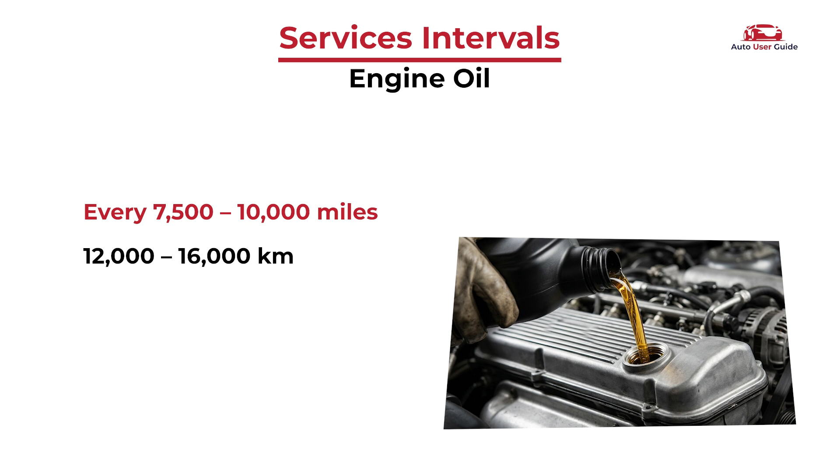Engine oil needs to be changed every 7,500 to 10,000 miles, which comes out to around 12,000 to 16,000 kilometers. If you drive in tough conditions or put a lot of load on your engine, sticking to the lower end of that range is the better call.

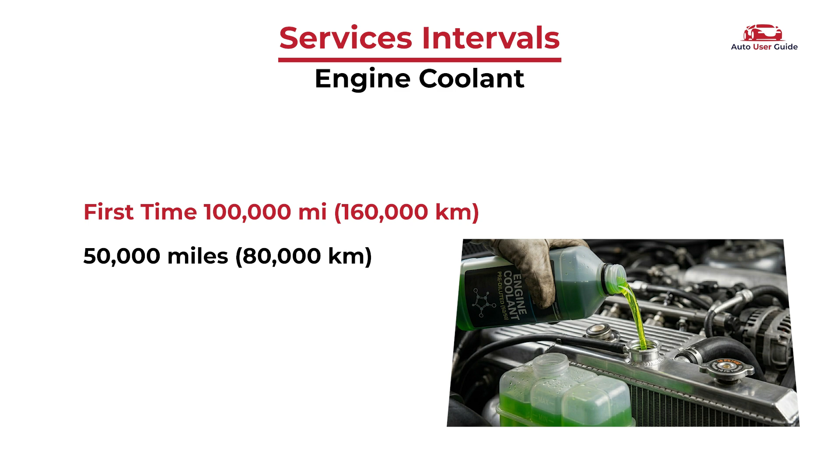Engine coolant has a much longer life. The first replacement comes at around 100,000 miles. After that, it needs to be swapped out every 50,000 miles going forward. It keeps your engine temperature in check, so keeping it fresh is something you don't want to skip.

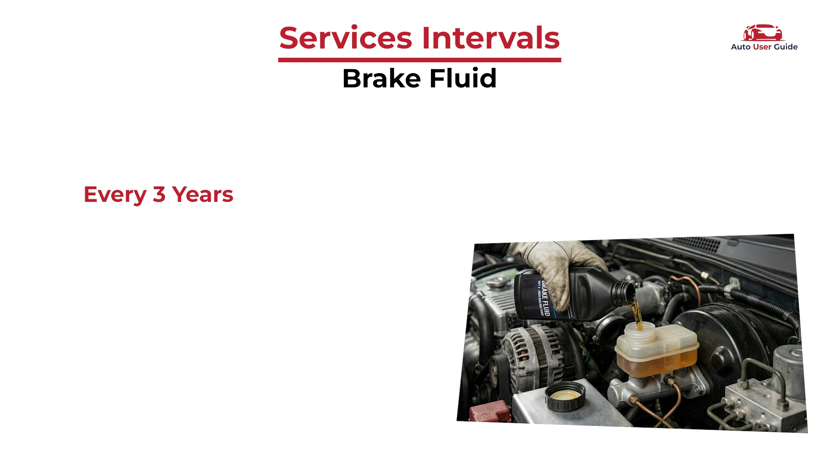Brake fluid should be replaced every 3 years, or somewhere between 30,000 and 45,000 miles, whichever one comes first. Over time, it absorbs moisture, and that slowly reduces how well your brakes respond.

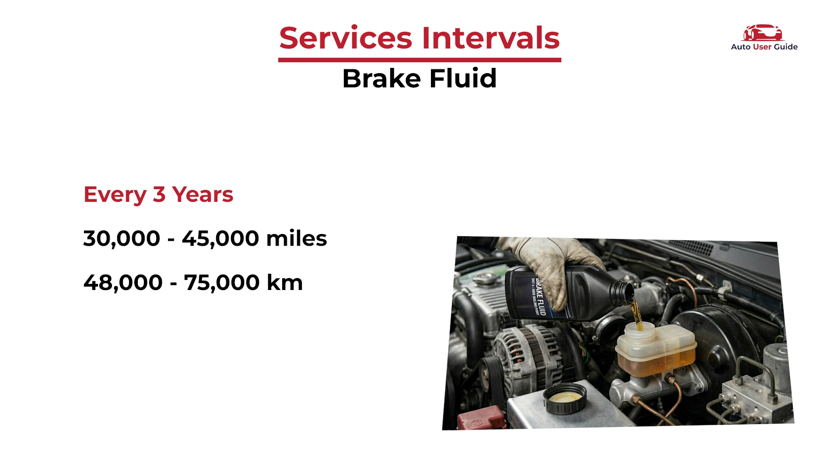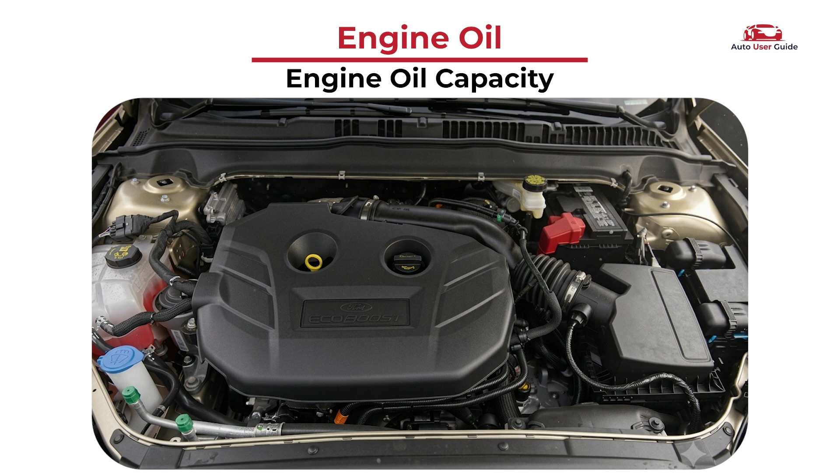Engine oil. Engine oil capacity. Alright, so when it comes to engine oil capacity, the amount your car needs depends on the size of its engine. Not every engine drinks the same.

If your car runs a 1.5-liter engine, the total oil capacity, including the filter, is 4.3 US quarts, which comes out to about 4.1 liters. That's your number every time you do an oil change.

If your car has a 2.0 or 2.5-liter engine, it's going to need a bit more. The capacity there, again, including the filter, goes up to 5.7 US quarts, or roughly 5.4 liters.

And if your car has the bigger 2.7-liter engine, the capacity increases a little further. Including the filter, it comes to 6 US quarts, or about 5.7 liters.

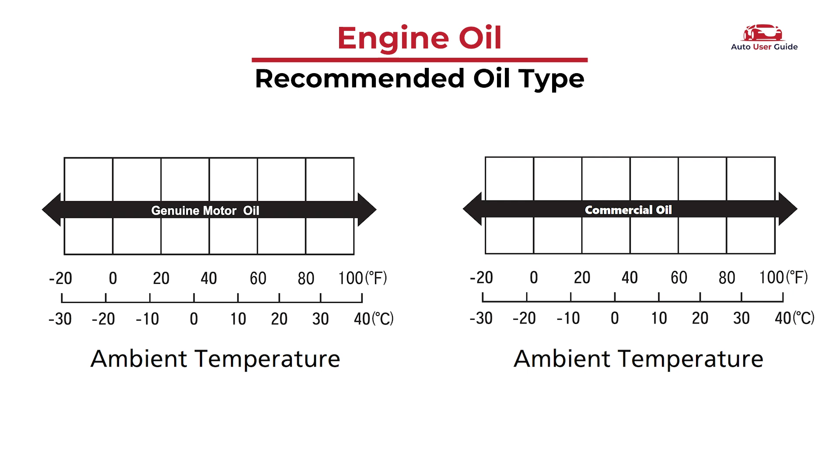Recommended engine oil. Now let's talk about which engine oil you should be using. The recommendation is to go with a genuine engine oil, or any good quality commercial engine oil, if it matches the right type and viscosity for the temperature in your area.

That last part matters more than people realize. The oil that works well in a cold climate isn't always the best choice for somewhere hot, so always check the viscosity chart and pick accordingly.

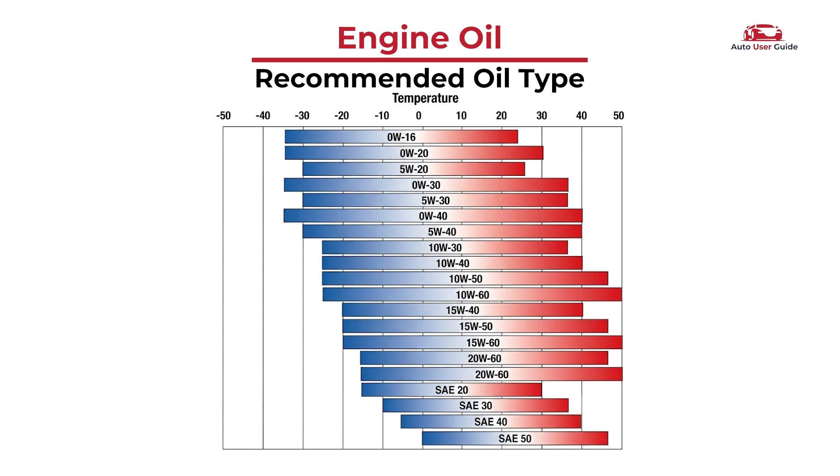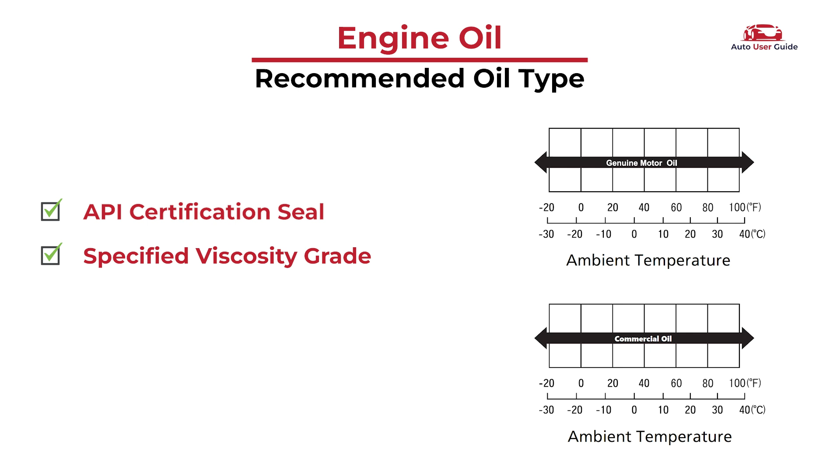On the topic of synthetic oil, you can use it. Synthetic motor oil is perfectly fine as long as two things check out: it carries the API certification seal, and it matches the viscosity grade your engine calls for. If both boxes are ticked, you're good to go.

Change engine oil and oil filter. Before anything else, change your oil and filter based on the maintenance message that shows up on your driver information display. That message is your reminder. Don't ignore it. Here's how the full process goes.

Step 1. Start the engine and let it run until it reaches its normal operating temperature. Once it's warmed up, turn it off. Warm oil drains out much more easily than cold oil.

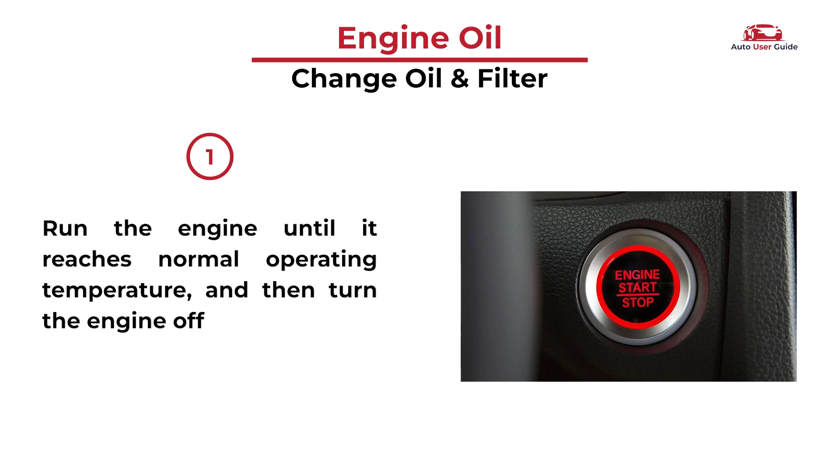Step 2. Open the hood and take off the engine oil fill cap. This helps the oil drain smoothly by allowing air in.

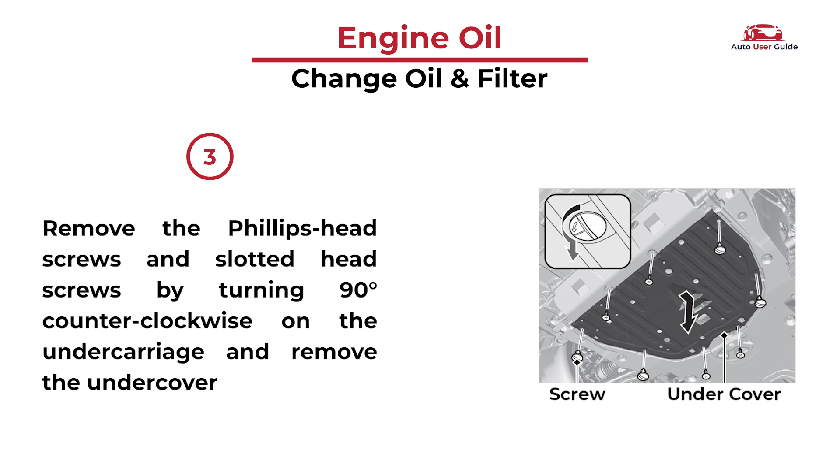Step 3. Get under the car and locate the undercover. Remove the Phillips head screws and slotted head screws by turning them 90 degrees counterclockwise. Then pull the undercover off.

Step 4. Find the drain bolt at the bottom of the engine. Remove it along with the washer and let the old oil drain completely into a container placed underneath.

Step 5. Remove the oil filter and let any remaining oil inside it drain out as well. Set it aside for proper disposal.

Step 6. Before putting on a new filter, check that the old filter gasket didn't stick to the engine's contact surface. This is a small but important check. A leftover gasket can cause an oil leak.

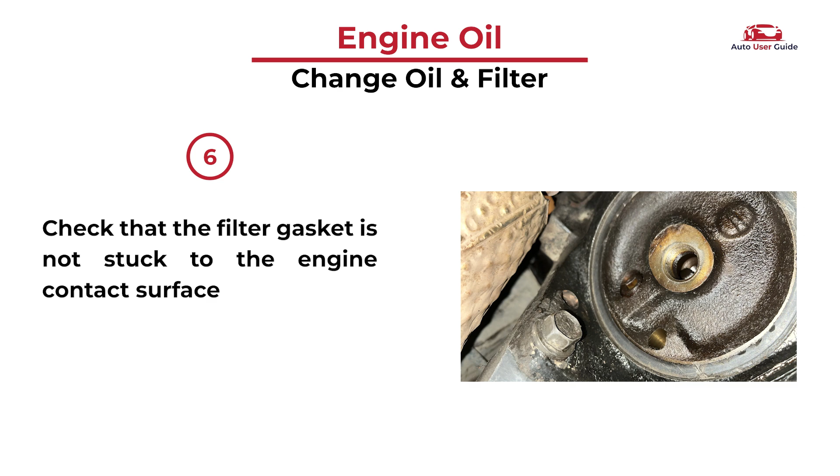Step 7. Clean the contact surface on the engine block, wiping away any dirt or dust. Then install a fresh oil filter.

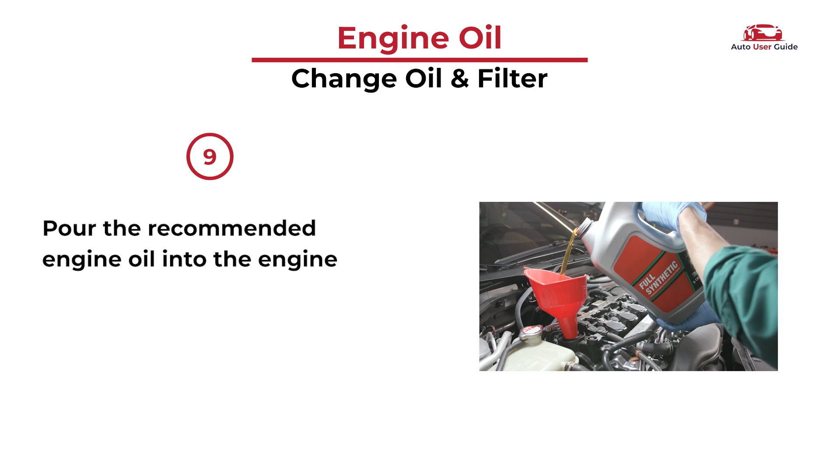Step 8. Put a new washer on the drain bolt and reinstall it back into the engine. Step 9. Pour in the recommended engine oil. Make sure you're using the right type and the correct amount for your engine size.

Step 10. Put the oil fill cap back on securely and start the engine. Step 11. Let the engine run for a few minutes, then get underneath and check around the drain bolt and oil filter for any leaks. If you see drips, shut the engine off and address it before going further.

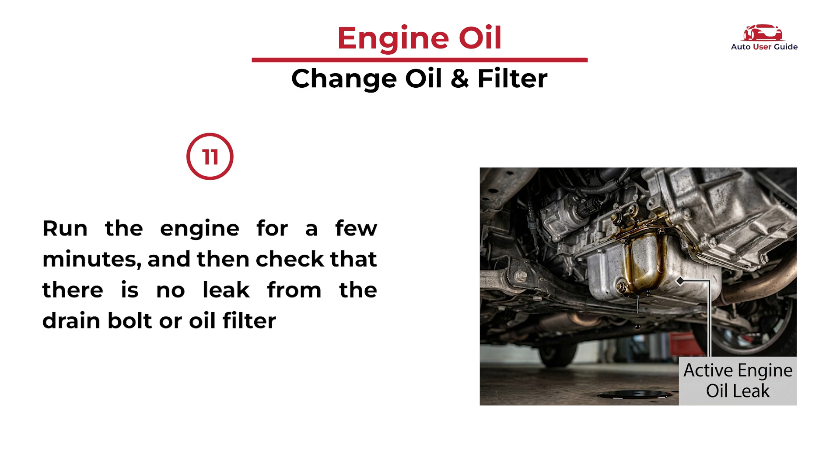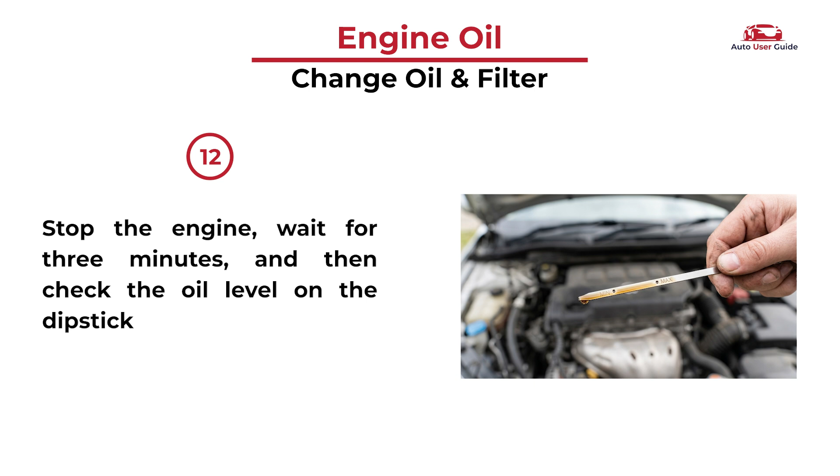Step 12. Turn the engine off and wait for about 3 minutes. This gives the oil time to settle. Then pull out the dipstick and check that the oil level is right where it should be.

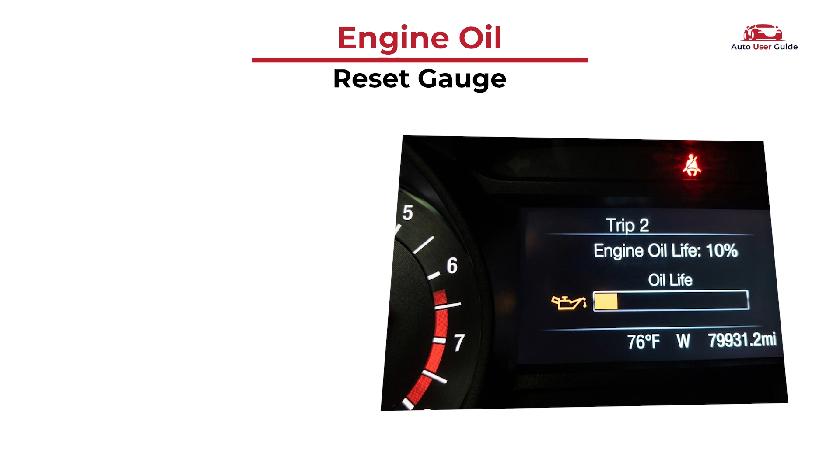Reset the gauge. After you've changed the engine oil, there's one more thing you need to do: reset the oil life gauge. If you skip this step, the car won't know the oil has been changed and will keep showing you an inaccurate reading. Here's how to do it on your car.

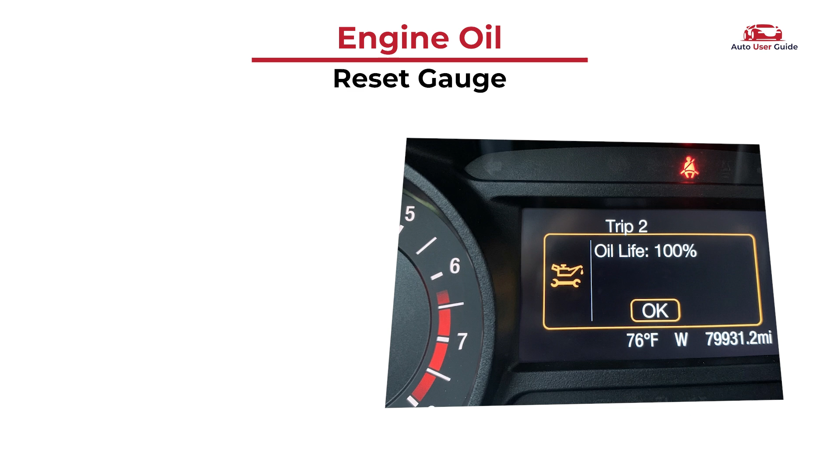First, make sure the ignition is on. You don't need to start the engine, just press the start button without pressing the brake pedal so the system powers up. Next, go to your driver information display and navigate to the vehicle information menu.

You'll find an option that shows your current oil life percentage. Once you're on that screen, press and hold the selection button, usually the one on your steering wheel, for about 10 seconds. The oil life indicator will start to blink, which means it's ready to be reset.

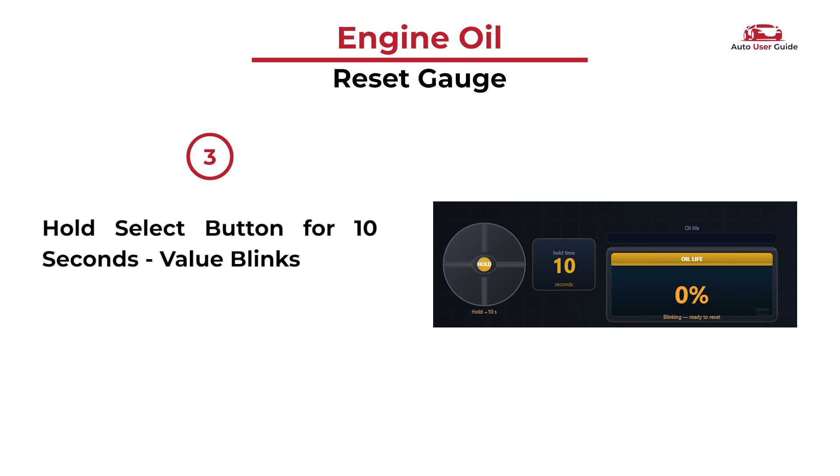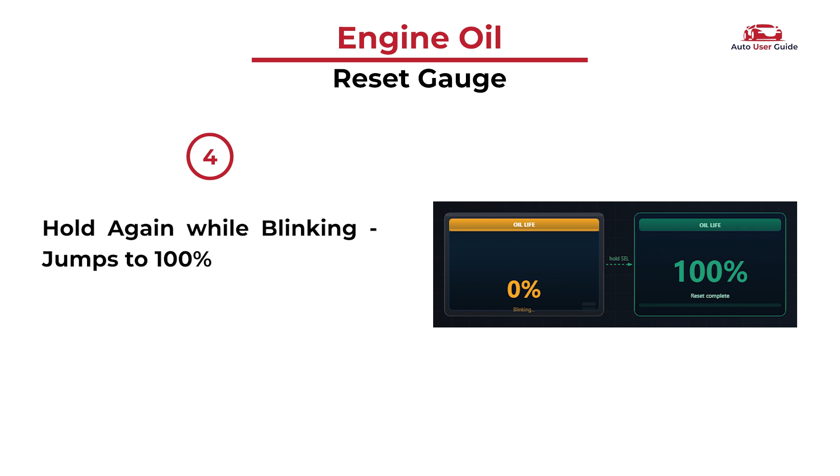While it's blinking, press and hold the button again. The display will reset back to 100%, confirming that the system now recognizes the fresh oil. Once you see 100% on the screen, you're done. The gauge has been successfully reset.

After that, go ahead and start the engine normally. Let it run for a moment and confirm that no warning lights related to the oil are showing up on the dashboard.

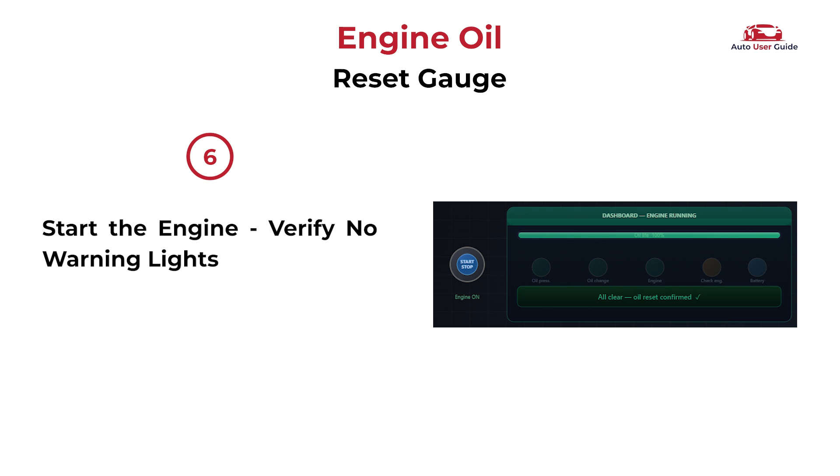Now we're moving on to coolant and fluid specifications. Keeping your coolant at the right level is just as important as your engine oil. It keeps your engine from overheating and running into serious problems.

Engine coolant, radiator. Before you touch anything, make sure both the engine and the radiator are completely cool. Never open the radiator cap on a hot engine. The pressure inside can cause boiling coolant to spray out and burn you.

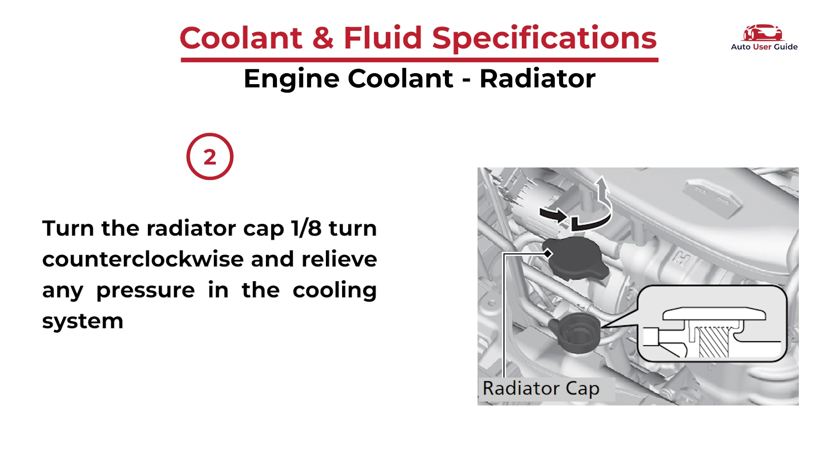Once everything is cool, place your hand on the radiator cap and turn it just 1/8 of a turn counterclockwise. This releases any built-up pressure inside the cooling system. Give it a moment to settle. Now push the cap down and continue turning it counterclockwise to fully remove it.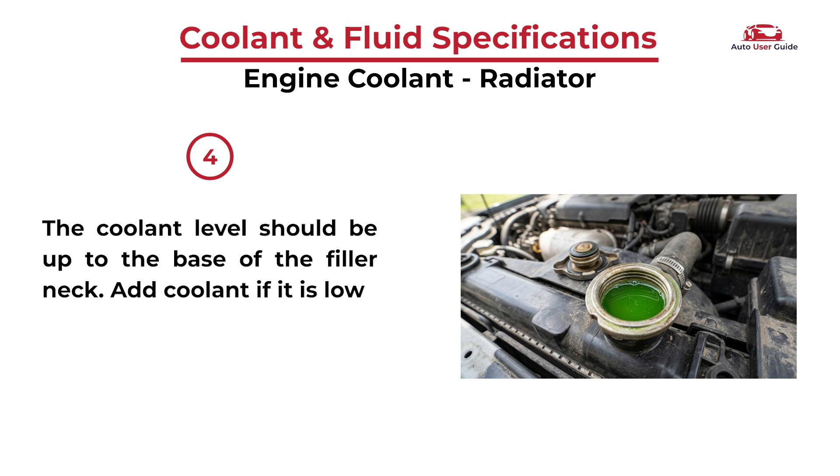Look inside and check the coolant level. It should be right up to the base of the filler neck. If it's sitting lower than that, go ahead and top it up with the correct coolant. Once the level is good, place the radiator cap back on and tighten it fully. Make sure it's secure before you close the hood.

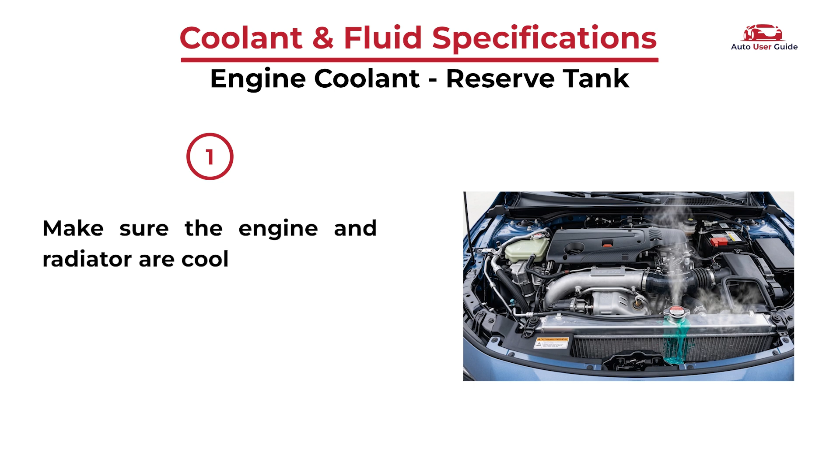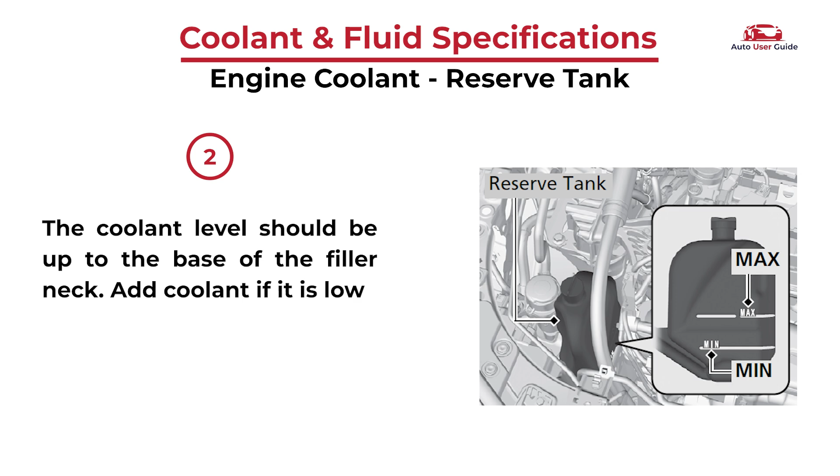Engine coolant, reserve tank. Again, before checking anything, make sure the engine and radiator have cooled down completely. Now locate the reserve tank. It's a small, translucent container usually sitting near the radiator. Look at the side of the tank and check where the coolant level sits. If it's below the minimum mark, add the specified coolant slowly until it reaches the maximum mark.

Don't go above it. Once the level is good, take a moment to inspect the cooling system for any leaks. Look around the hoses, the radiator, and the reserve tank itself. If you notice any drips or wet spots, that's something that needs attention before you drive the car.

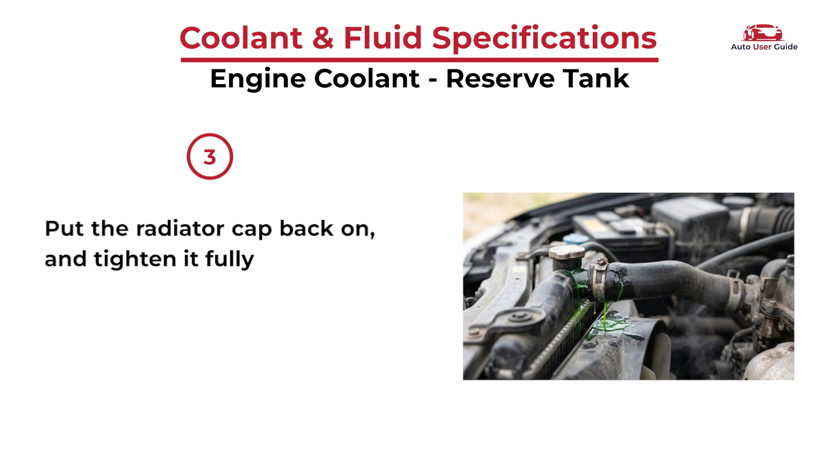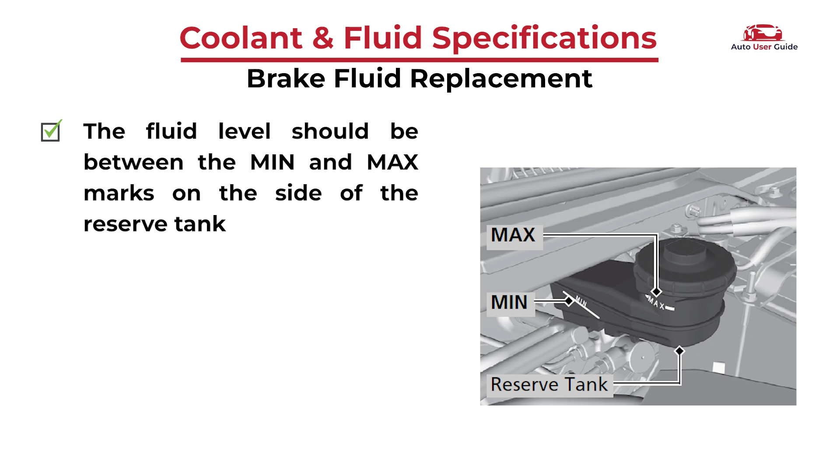Now, let's talk about replacement of brake fluid. Checking your brake fluid is straightforward. On the side of the brake fluid reserve tank, you'll notice two markings, a minimum and a maximum line. Your fluid level should always be sitting somewhere between those two marks.

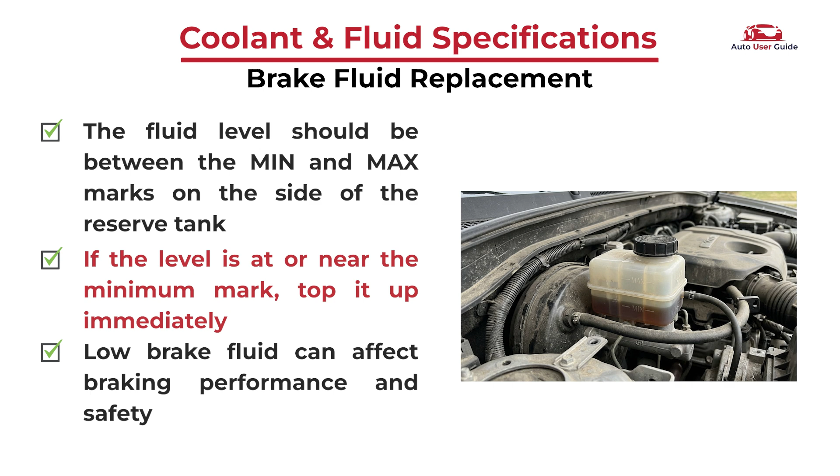If the level is at or near the minimum mark, you need to top it up. Don't let it drop below that line. Low brake fluid can affect how your brakes respond, and that's not something you want to find out about while you're driving. At the same time, don't overfill it past the maximum mark either. Just keep it in between and you're in good shape.

One thing worth mentioning for those driving a manual transmission model, your brake fluid reserve tank also takes care of the clutch fluid. It's the same tank serving both systems. So, as long as you're keeping the brake fluid level between the minimum and maximum marks like we just discussed, you don't need to check the clutch fluid separately. It's already covered.

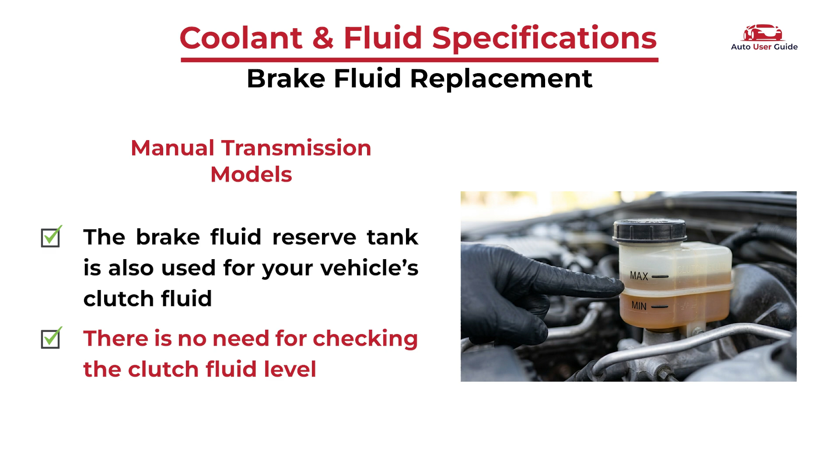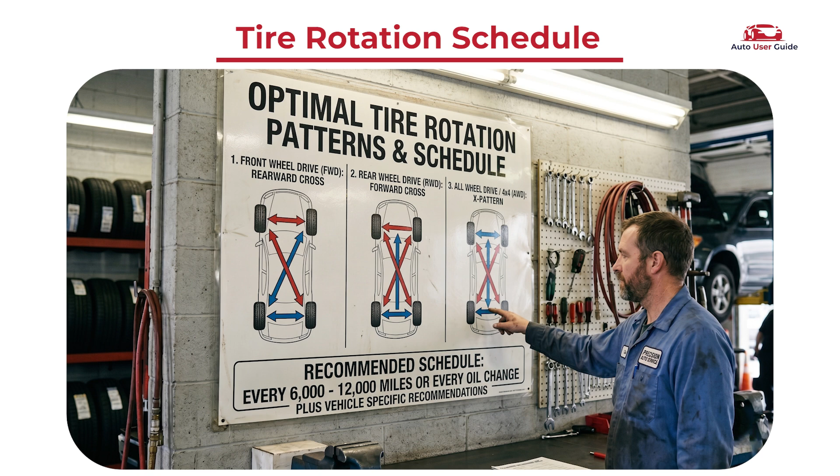Tire rotation schedule. Tire rotation is one of those maintenance steps that people often overlook, but it makes a real difference in how long your tires last. Generally, you should be rotating your tires every 6,000 to 12,000 miles. If your vehicle manufacturer recommends a different interval, go with that instead.

Tires without rotation marks. The diagram on screen shows the rotation pattern for tires without rotation marks. These are also called non-directional tires. Because they don't have a fixed direction of rotation, you have more flexibility in how you rotate them. In this pattern, the front left tire moves straight back to the rear left position, and the front right tire moves straight back to the rear right position.

Then, at the next rotation interval, the rear tires cross over, the rear left moves to the front right, and the rear right moves to the front left. This cross-rotation method spreads the wear more evenly across all 4 tires, which helps them last longer overall.

The rotation here is simpler. Tires just swap between front and rear on the same side. The front left goes to the rear left, the rear left comes up to the front left, and the exact same thing happens on the right side. It's a straightforward swap, just without the crossing over that you do with non-directional tires.